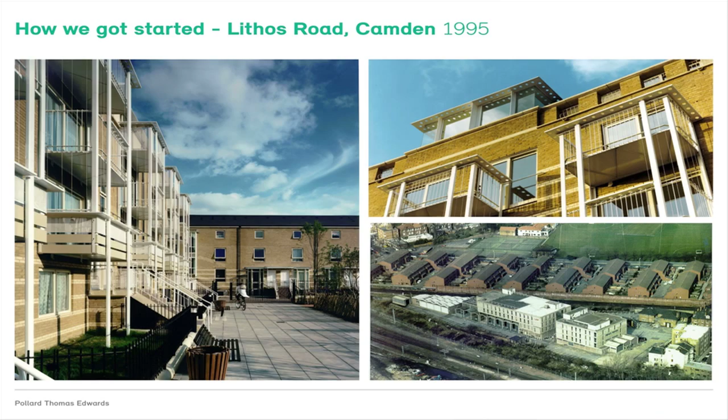So I came along and joined the practice in 1984 as a Part 2 student, and I got to work as project architect on this PTE development for 20 shared ownership apartments. It was a fantastic education in how to design with a clear focus on the customer, the brief, and the budget.

So you've asked us to describe our business model, and I guess these are the key points to make. The first one is that we make sure that our development activity is legally and financially separate from the architectural practice. And secondly, we set up single-purpose companies for each of our developments so that they're insulated from one another.

The shareholders in those companies are those directors of the architectural practice, or partners as we now are because we're an LLP, those who want to participate and crucially have the means to do so. So at the start, we had to raise capital by remortgaging our houses, and we reinvested the proceeds of each venture into the next one.

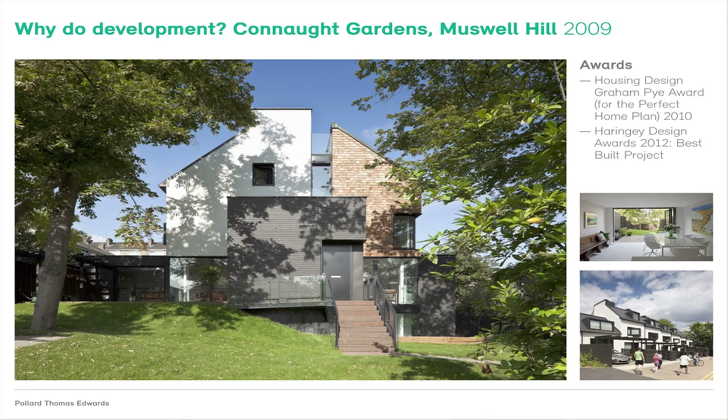We don't just do development to make money. We do it because there's a virtuous circle between our core business of architectural consultancy and our secondary business as property developers. It helps us think like a client and bring to our third-party clients the understanding and aptitude we've learned as developers. Development takes up a small part of our time, but it has a big and positive impact on our ethos and brand. Above all, it's incredibly empowering and fun to link design and commerce in such a direct way, and to explore holistic solutions which produce the best combination of outcomes.

So in the last 10 years, all our development projects have been popular, profitable, and they've won lots of design awards. So I hope that even the venerable worthies of the pre-1979 RIBA would approve.

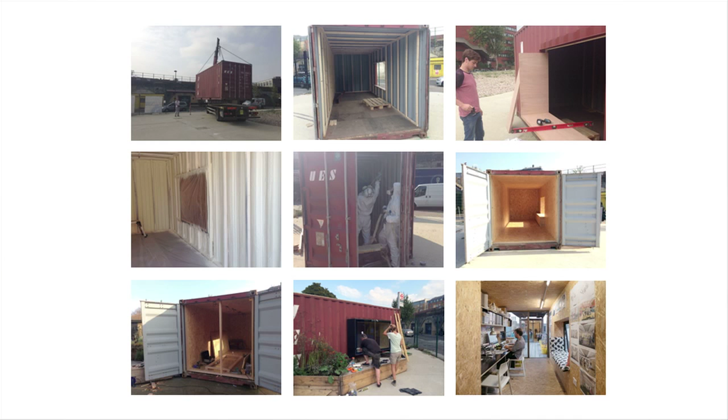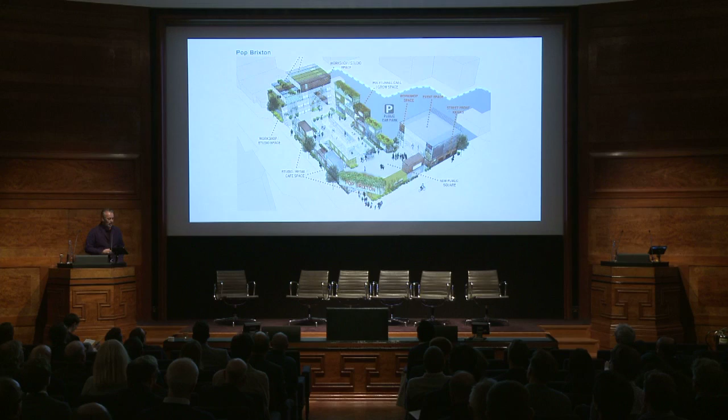So our model is really simple. We built one at our office about 2 summers ago, myself and a couple of Part 1 architects, so we could figure out how easy it was to actually convert a container, and how much it would cost. So we've got a model of 10K to deliver a finished 20-foot container, 15K to deliver a 40-foot container. We won a competition to use this piece of empty land in Brixton for 3 years with Lambeth Council as our partner.

We've got a very simple profit share model with them. They put the land in, we do everything else, so they get half the profit. We were way too generous, but it was an open competition, so you kind of blind pitch. We've learned some lessons there.

So the idea was to create a mixed-use campus of workspaces, bars, cafes, and lots of other things. With our social enterprise ethos, it's also about training and mentoring. So we built the site with 15 apprentices from Lambeth Construction College that we paid London Living Wage to. It was quite painful. We acted as a main contractor, drawing on all the small project experience we'd had. It was by far and away the biggest project we tackled, but we managed to deliver it with no extra cost to the organisation.

It opened last summer, the first phase, which was the bars and cafes. It was instantly successful. We've been getting about 15 to 20,000 people a week through the door, so about 1 million people a year. We're at the moment measuring with the council the knock-on effects to the local economy and the rest of the businesses in Brixton.

It's a cross-subsidy platform, so the bars and cafes, the food places that people know, we really need, because those tenants we charge quite high rents, and we also take a profit share of their takings. But we're not just pocketing the money, we're using it to develop the social enterprise spaces at the back of the site. We've got a big co-work space with about 200 members, lots of other charities and social enterprises like Bounce Back, who train ex-offenders from Brixton Prison, a radio station, and lots of other things.

That's one of our office pods. These figures are a little out of date now, but I think we've created 400 jobs on site to date. What that's led to now is a whole pipeline of feasibility studies.

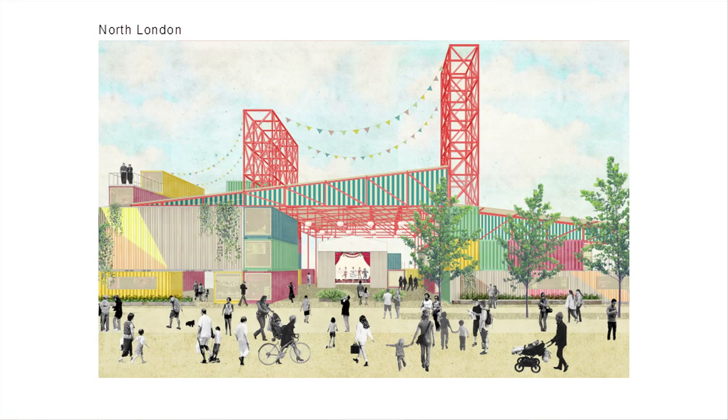This one's a huge site in North London for a private landowner that we're hoping to start work on fairly soon. We're also working with other social enterprises - this is some paid consultancy work for an organisation who wanted to do something similar in York. There's also a music venue guy who wants to do a backpackers hotel in a massive warehouse using containers, with a bar and cafe. So again, this is a sort of spin-off project for us.

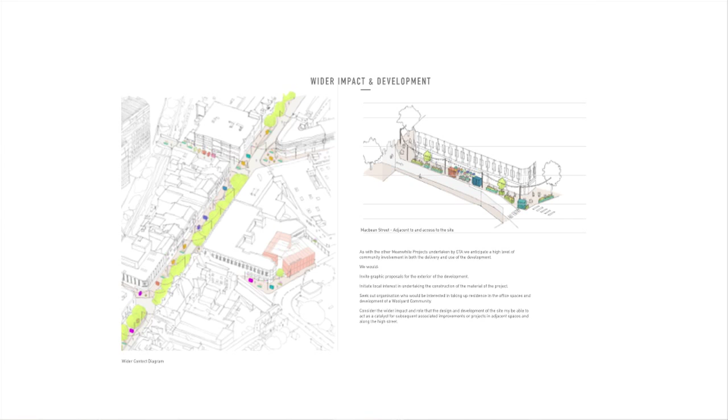There's also the redevelopment of the High Street in Woolwich, but as a meanwhile project, not as a temporary project, with some bars and cafes - this is for a private landowner. But again, using our model, we're writing business models for the developers and proving that if we work in partnership with them for a minimum of 5 years, we can deliver a return.

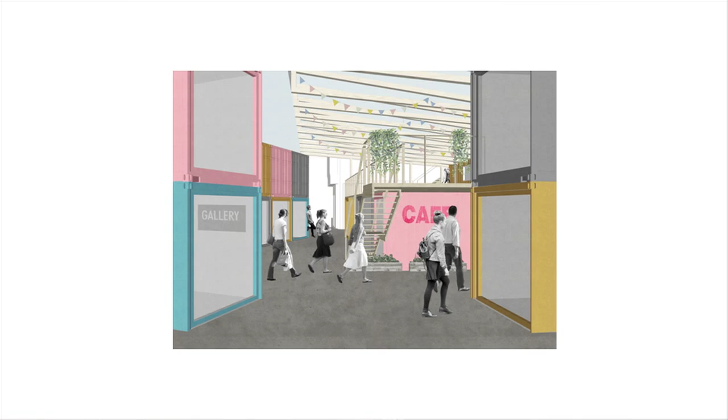We're looking at projects for housing too. This was a big one in Silvertown that kind of failed because we couldn't get long enough on the site. We've also just won a competition to convert the empty floors of Peckham car park, using the same model but not containers, to provide about 80,000 square feet of office space, artist spaces, maker spaces, event spaces, and so on.

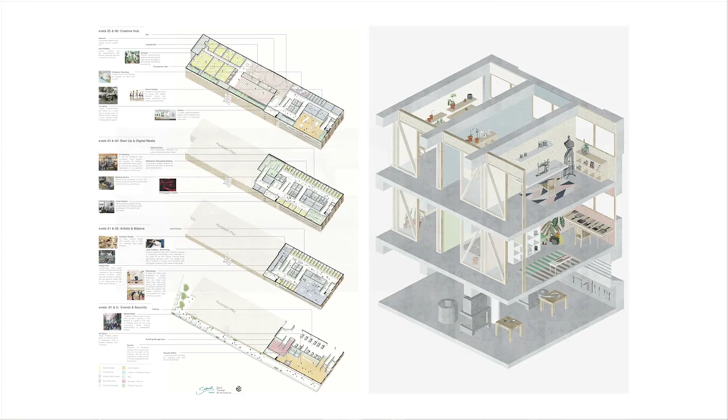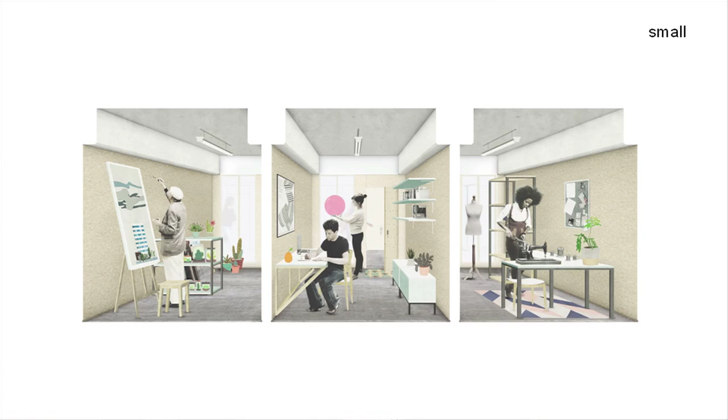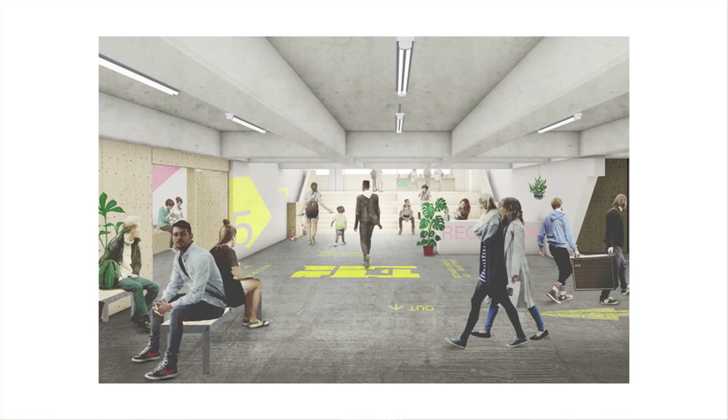So again, this is in partnership with Southwark Council, so we've learnt our lesson. We're only, I think, 20 or 25% shareholders on this one. So we're providing the smallest artist spaces, which are about £50 a month, the size of a car parking bay, slightly bigger studios, but co-work spaces, just keeping the building very raw, doing the least that we can because we want to expend the least resources possible.

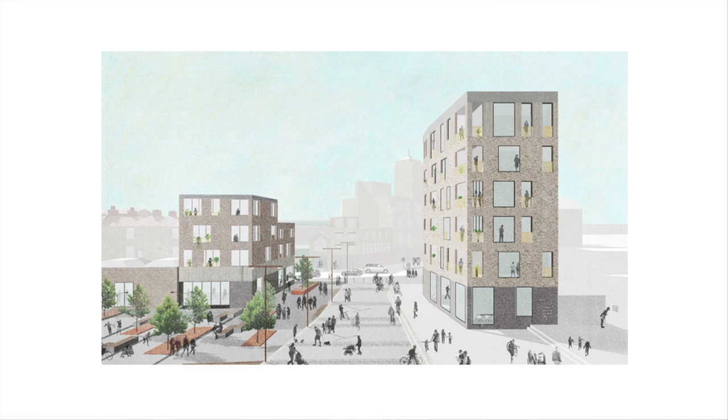And I guess the knock-on effect for us, as well as the actual core container business, is that it has transformed the practice. It's now bringing us other work in. So we're working a lot with Southwark Council, 2 projects around Peckham Square. This one's at committee tonight to remove Peckham Arch and build some mixed-use housing for the council, with a co-work space in one building and a gallery in the other.

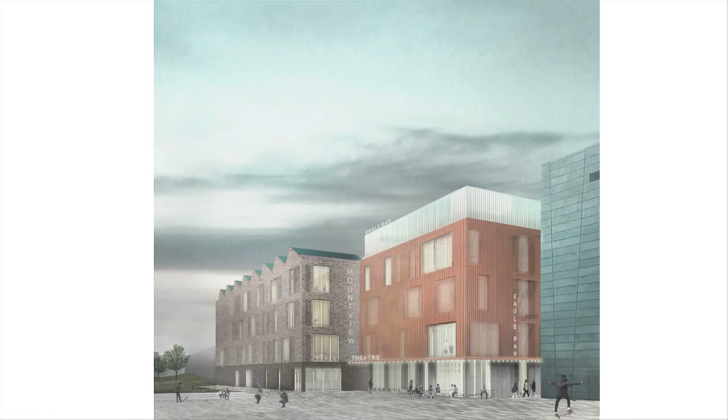And finally, the last project. So this started life as a shipping container project, a site behind the library, but because of the work we were doing with the council and our expertise in containers, we were the preferred partner. We received planning for this about 4 weeks ago, and it's 100,000 square foot, purpose-built drama academy with 2 theatres, cafes, bars. The developers really wanted to work with us because they knew we had a great understanding of delivering buildings and working on tight costs. So that initial tiny shipping container, 2 or 3 years later, it's led to projects like this for the office. So that's it.

This one is in Copenhagen, the so-called potato rows. Another type, the vecindades of Mexico City, was a particularly attractive, vibrant and adaptable example with very high density. This one was constructed in 1912 in the centre of the city.

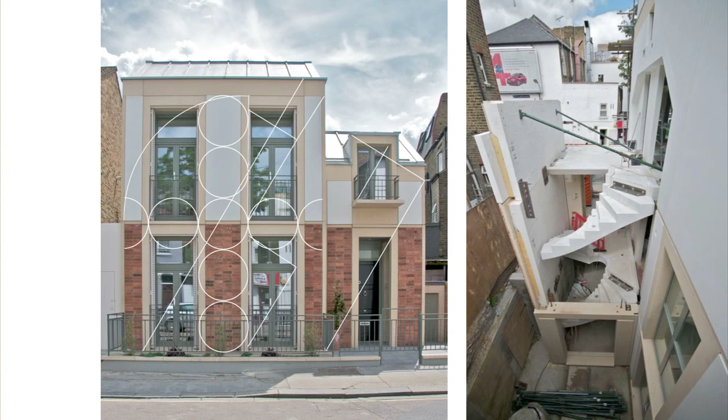Interviews were conducted with many of the residents, and all of the case studies were evaluated using a point system against 25 criteria. They related to 5 characteristics, which were urban form, adaptability, space and light, construction, and sustainability in its broadest sense. The results were summarised in the book, but also realised in a prototype.

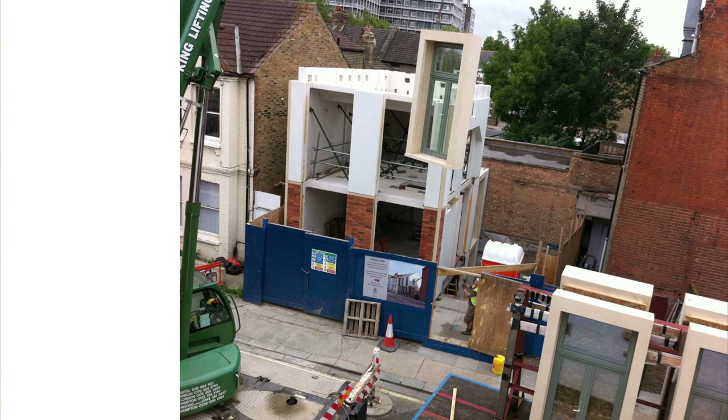Which was a single new build house in Hammersmith. The idea was to display those functional characteristics of the housing that had been studied around the world, but it also employed off-site manufacturing technology, which enabled the building to be assembled, in this case, in just 3 weeks after foundations had been completed. So this is the house being assembled. You can see it's modular construction, and this is what it looks like inside.

The prototype actually attracted an awful lot of widespread interest and acclaim. If you were to look at our website, rationalhouse.com, and look at the press page, you get a sense of that. It's not just architectural press, it's national and international construction press and newspapers as well. Hammersmith Council were interested in this and came along. They were just setting up an OJEU competition for a housing programme they initiated and encouraged us to get involved in that, which more of in a moment.

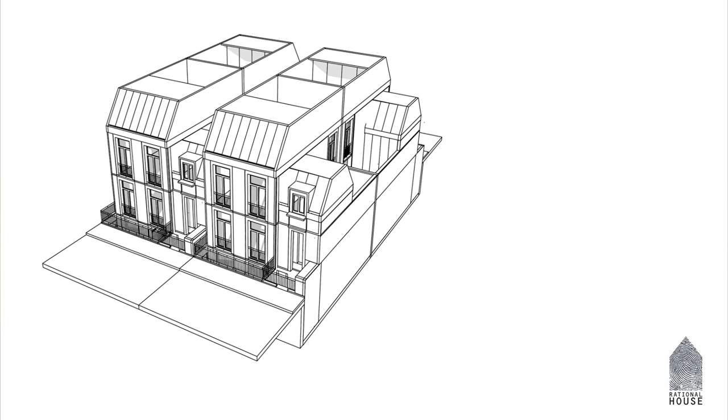So you'll see the journey developing as I go through this. The book had demonstrated that a component-based system could create dwellings and developments of many sizes, tenures and types, and the panelised system could be assembled to create a single dwelling or indeed clusters of dwellings, and fundamentally it was about an urban typology. They could be arranged in very compact configurations, with roof terraces and internal courtyards and basement living space and so on.

The book also demonstrated that these same components could be used to create developments like the international archetypes that the research had identified, such as this one, which simulates the vecindades in Mexico City.

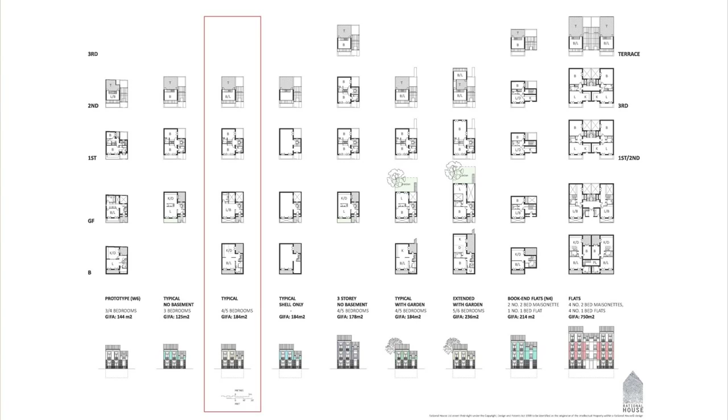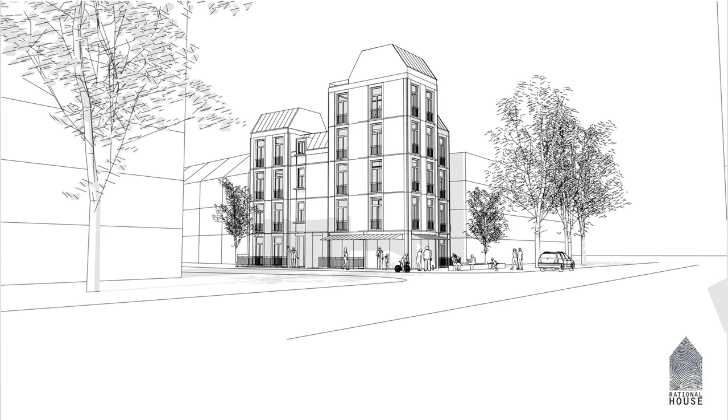We also adapted the system to the requirements of a number of private and public development clients to create, for example, city squares, multi-use urban infill buildings, larger multi-storey mixed-use developments, larger urban proposals which included retail as well, but also low-rise housing in a whole variety of formats.

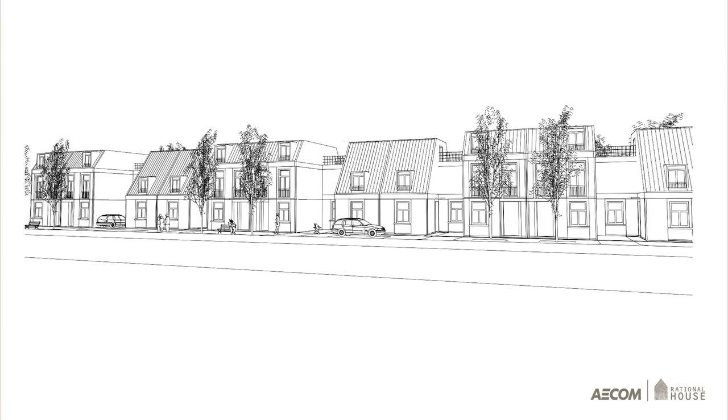So there was a decision made to create a limited company joint venture with other consultants, and this group initially consisted of Rational House, Arup as engineers, Davis Langdon as cost consultancy, and Reed Architecture. We won that Hammersmith OJEU, which was a framework for about 200 dwellings.

Over a period of time - and this is a long story I've got to tell in under 10 minutes - there was a decision made to aggregate the professional services and bring it all under one umbrella, which we did with AECOM.

And we set about establishing a brand, so we used the sort of pejorative term of prefab and tried to turn that around.

AECOM, as you may know, is a sort of multidisciplinary behemoth - I think these figures are out of date, it's probably double that size now. They employ architects, engineers, cost consultants, and so on, and more latterly they brought in construction services as well, so we had the ability to do everything.

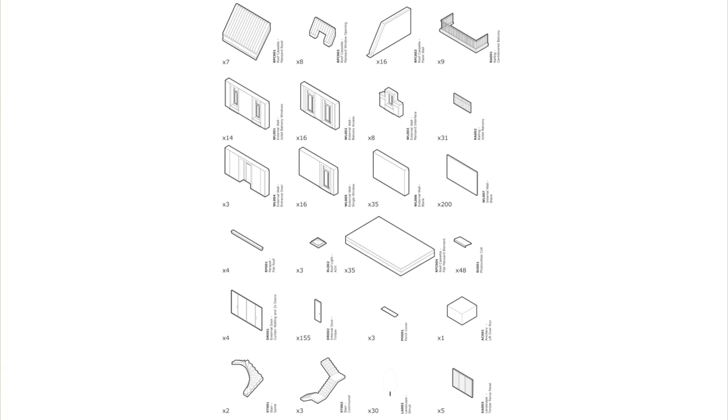And we started to refine that component set that we had so that it was less bespoke and better suited to manufacturing. This relatively limited set of components could be assembled to suit the particular constraints of pretty much any site.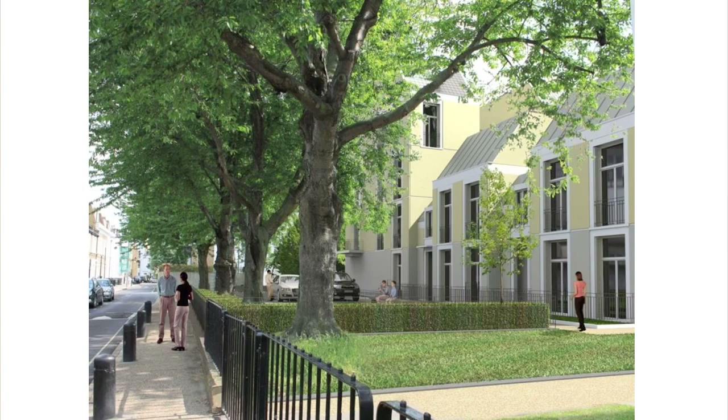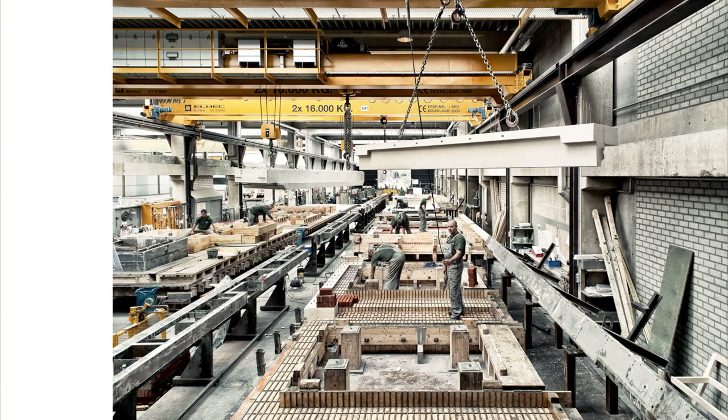And the same view as a visualization for planning purposes, to give you a feel for what we were preparing, and an idea of the scale. Herx is an enormous company - they had the capacity for us to create several hundred dwellings a year.

So there is a sort of message here about how you go about doing these things. I think that's happened for various reasons, and it's to do with understanding the nature of collaborative working - everyone has to do that. You must make sure there are no sort of business-as-usual attitudes, and you have to approach these things from the point of view fundamentally of product-based design, and that wasn't always the case.

As I say, it's a long story and I don't really have time to go into the detail. The optimum structure, I think, would really be - and I was talking about this with someone earlier on - a Rational House acting potentially as developer as well, and we did set up Rational House Developments to be able to do this.

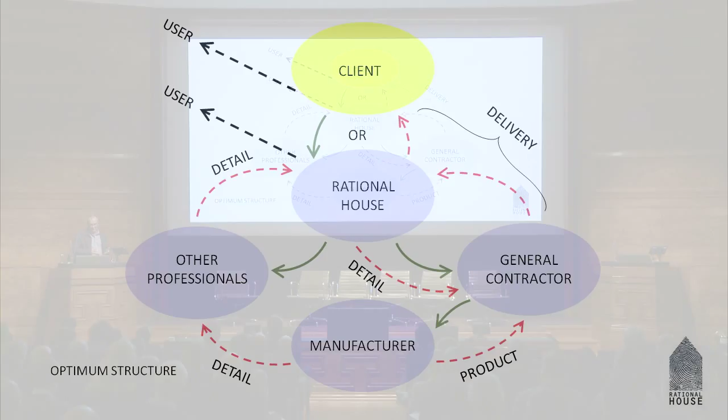There would be advantages to this: having single point responsibility for delivery and liability, full control over the product development, marketing, investment, pricing and so on, and better alignment of the aspirations of the participants. So I think this would be the ideal model. The other one was the way it ended up going.